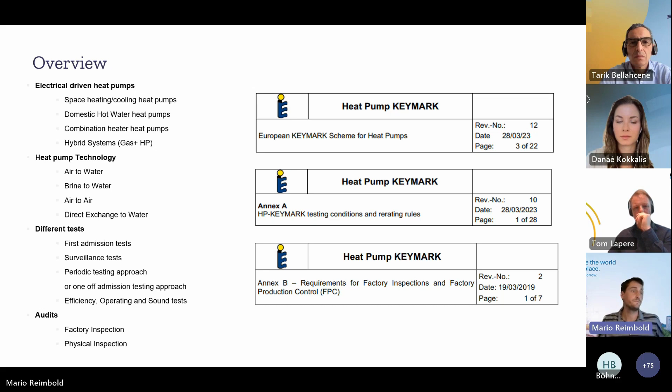Just to give you a short overview about the most common tested and certified products, most of them follow the EN 14511 and EN 14825 to define the test requirements for setting up the heat pumps, installing them, defining the measurement accuracy, and also defining the test points, which have to be measured depending on the temperature level, either low, medium, or high temperature, and also the climate zone.

And of course, for the domestic hot water, we're following the EN 16147, and for the sound power measurement, we follow the two standards, 12102-1 for the central heating and -2 for the domestic hot water ones. And of course, I mentioned the groundwater heat pumps. We're following this standard here, and all of them in the current version.

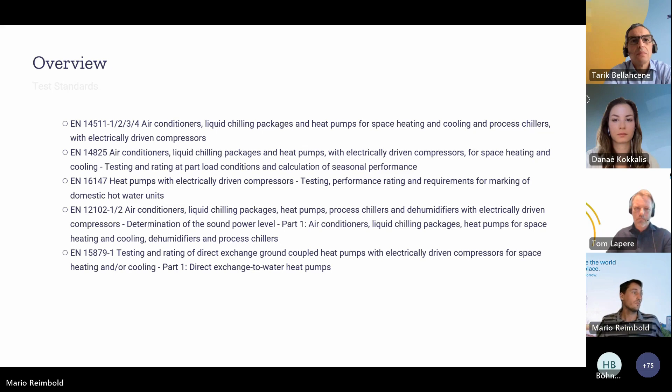So let's have a look at the testing procedure. I created this table a while ago, and I still had to adjust it a bit, but I would like to focus now on columns B and C, which are admission and surveillance, because I would like to point out the difference between them.

When we're talking about the space heating or the space cooling test, the effort at the first admission is higher than the effort during the surveillance test. That means if you have, for example, a heat pump which has a certification for low and medium temperature, or which wants to have one, then you have to test both of them. For an air-to-water heat pump, for example, A7W35 and A7W55.

And if you do the surveillance later, after 1 year, you just have to do either one of them, which is usually defined by the certification body. So the effort will be lower. Same for space cooling tests: then it is only one application of the two space cooling test points. It is different with the sound power level test. You have to repeat the sound power level test; it doesn't matter if it's a central heating or domestic hot water device.

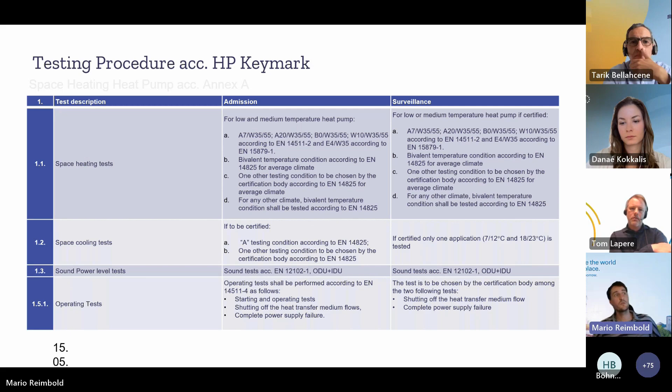The operating tests: we had a big discussion about that within my team. So what are actually operating tests? Because according to 14511, there are actually more operating tests defined. But if we talk within the HP KEYMARK scheme group about the operating test, we talk about the starting tests, shutting off the transfer medium flow and the complete power supply. We're not talking about the boundaries, for example, which take a long time for the test institute. And if we do the surveillance, we have either shutting off the transfer medium flow or complete power supply failure. So you can see that the difference between admission and surveillance is just the amount of necessary testing.

If we talk about domestic hot water devices, it is pretty similar. The sound tests have to be done completely during both admission and surveillance. If we do the tapping test, so the actual performance test, it is similar, and for the operating test, comparable to the central heating devices, you have to do one less. But actually for the domestic hot water test, you have to do pretty much the same during first admission and surveillance.

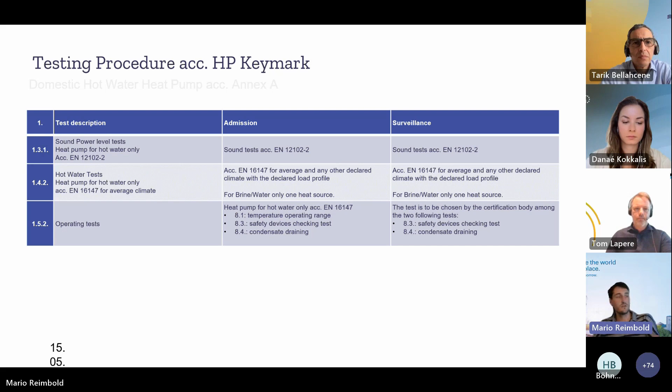And combination heat pumps actually follow both previous slides, depending on which technology you're talking about. Central heating and domestic hot water are tested differently. For central heating, at admission you have more effort, and during surveillance less effort. And for the domestic hot water and the sound test, you have to do all the tests. So these are the different tests which need to be done for admission and surveillance.

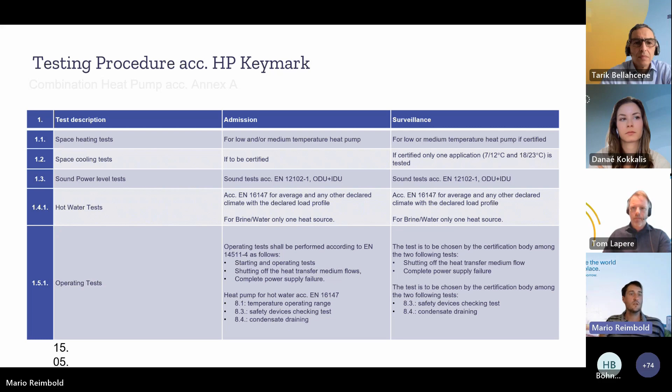And what do we do during the test? I told you that we're basically following the 14511 and 14825 tests. So this is a typical test point for the evaluation of the volume flow during A7W35, and this is actually A2W35. We're just following the standard rules and testing each point according to 14511 and 14825, which is necessary to calculate the seasonal efficiency to follow the ErP rules.

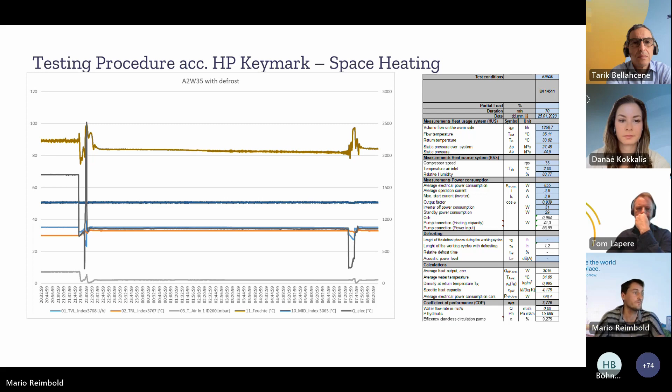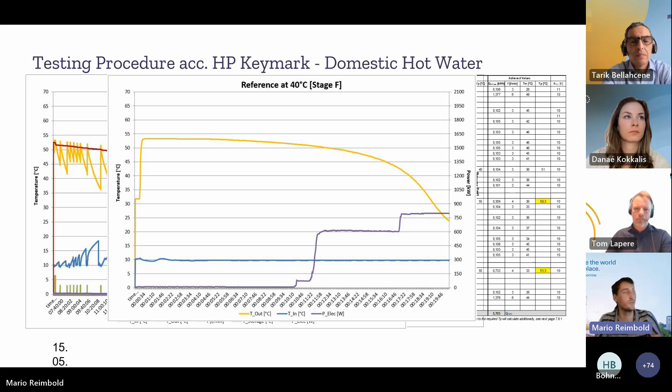And during the domestic hot water test, we have the same situation. You have the heat-up phase. You have the standby power input, where you actually measure the losses. Then you have the tapping profile, where you measure the actual tapping efficiency, and the V40 tests. And as I said, all of them have to be performed during first admission and during the surveillance test.

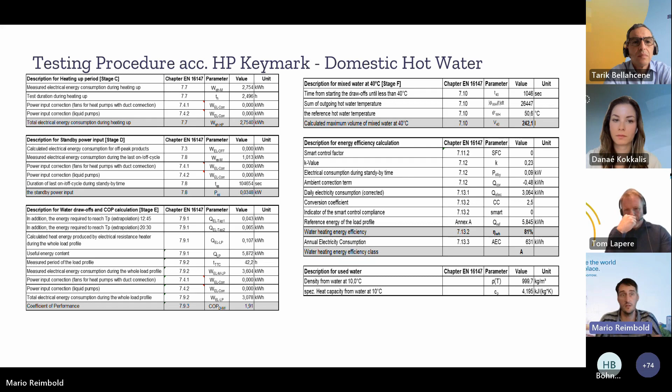The calculation methods: no differences. We still follow the rules, and this is what needs to be presented to the certification body later on, combined in the report, so that everybody can see what was tested, what was the result, and what is the declared value.

The time frame is approximately 1 week for testing a central heating device. It depends on the kind of device, whether it's a split unit or a monoblock unit, and also on the size of the machine. A combination heat pump usually takes 2 weeks because you have to test both the central heating function and the domestic hot water function. And for domestic hot water, it's usually 1 week.

This depends on the hysteresis of the set point. So if you have a large hysteresis, for example 10 or 15 degrees, the tests usually take longer. The standby phase then takes way more than 48 hours; usually it's something between 70 and 80. We have seen that, and this extends the test time.

Common problems: of course, there are problems everywhere during testing. We have to set up the compressor frequencies during the test, especially for the 14825 tests, which means we need the possibility to access the system or the inverter. This is usually done by an external computer or laptop provided by the manufacturer, or within the control unit with a special password to enter the setup area.

And sometimes we experience problems with the measurement technology inside the heat pumps. So we have a defective sensor, or the problem is that we're measuring for a long time.

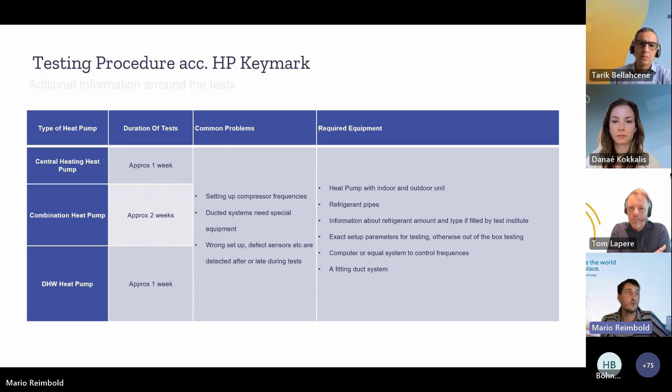It is very important, and the computer or equal system to control the frequencies, and especially for the sound measurements, and I will focus on that now. The fitting duct system is important. It must be the correct shape and the correct material. So let's talk about the sound measurements.

We have usually, this is an example for a domestic hot water pump, a ducted system installed on the top of the machine, and this duct must be a reverberant piping. And if it's not a reverberant piping, or it is an absorbing piping, this can have an influence on the measurement results. And so it is defined in 12102-2 that the material must be reverberant, so that the sound emission which is coming from the actual machine can't be absorbed during the measurement. And we measure the actual sound.

So this is sometimes very difficult to install, because the standard defines that you need lots of space above the heat pump, and some of these heat pumps are even 2.30 meters tall. So you need quite a high acoustic chamber to be able to install it according to the standard. And that's sometimes a problem, but usually a solution is found everywhere.

And the other thing is split units. Then you have to do 2 tests, for the outdoor unit and for the indoor unit, of course. Usually the indoor units are very, very silent, especially if we're talking about hydraulic split. So if we have, for example, an R290 unit, which is constructed as a monoblock device, and it's just working with a hydraulic unit which is sitting inside, there is almost no noise coming from the hydraulic unit, and it is almost impossible to measure it because it is below 20, 22 or 23 dBA.

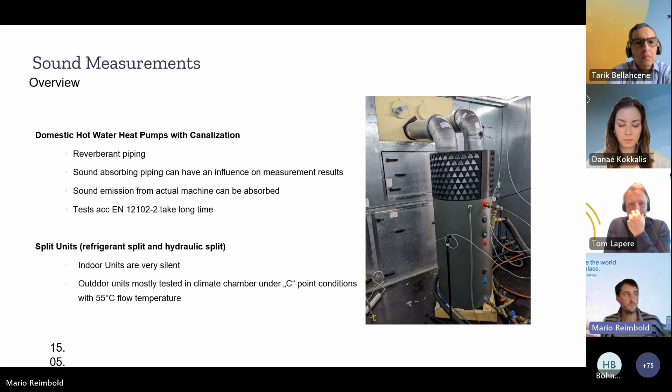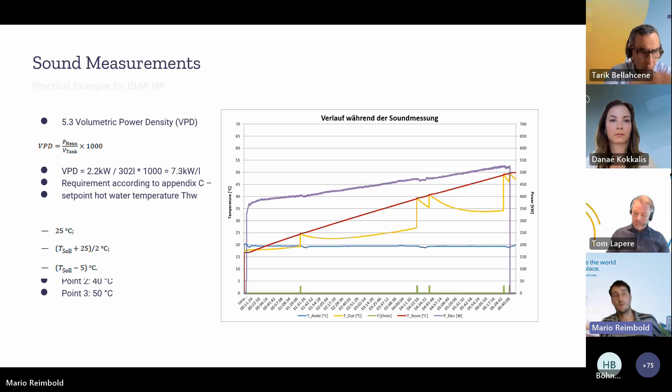So that usually takes a whole day to do that testing, with installing, with heating up, and some of you might know that some domestic hot water heat pumps really have low heating capacities, just a few hundred watts. So it really takes a long time to do this testing. As you can see here, it was something like 7 hours. And yeah, this takes a whole day. Yes, so that was testing procedures for first admission, surveillance tests, and sound measurements.

And now I would like to focus on the factory production control. During the factory production control, which usually happens after the certification, we focus on the production circuits, on the production line in the production plant. And why we're doing it: to ensure that the product is being produced according to the HP KEYMARK rules, of course, and make sure that the product is produced as we have tested it. And if the production plant has an ISO 9001 certification, we can do an abbreviated examination, but we're still focusing on some points of the document parts.

So it's a bit small. I hope you can read it, but what you can see here are 3 pages from the factory production control report, which you can find also online on keymark.eu, and you will find several requirements. The first pages are mostly information, with where it is, the address. Then it contains a list of the certified products, which is really important.

Then the persons who are in charge for the quality and who are in charge for the audit. But after chapter 3 and 4, we're talking about requirements for the actual production, and so that is mostly our focus during the inspections, that we check the measurement instruments which are used during the production or in the production line.

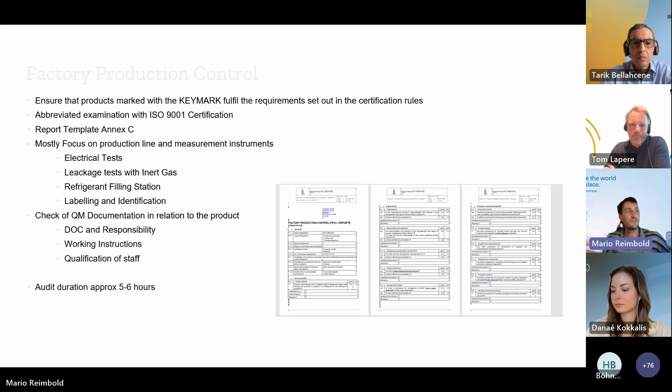And the other thing is the physical inspection. In the physical inspection, we do not focus so much on the production and on the quality management of the plant. We're focusing more on the product. So what we're doing there is we're trying to identify each part of the product and make sure that it is the same as it was during the initial type test. So we check for the compressor, the expansion valve, heat exchanger, condenser, evaporator, whatever you find in the machine, we check for it.

We check dimensions, for example, the same opening for the ventilation, etc. We also check for the software version. We know that there is not a big influence by the software version, because most of the time the software version is just updated for comfort issues, or maybe to delete some errors. It is not affecting the efficiency. At least it should not. But we're still checking it during the initial inspection and then during the physical inspection. So if there is an update, you can see the development, but there shouldn't be any influence on the performance.

If applicable, we can also do a picking. That depends on how many production plants you have, how many devices you have certified, and which approach you're following. I've mentioned the 1 out of 5 approach, and I have mentioned the one-off approach. If you're doing the one-off approach, you don't have to do a picking. But if you do the 1 out of 5 approach, you have to do the picking every following year.

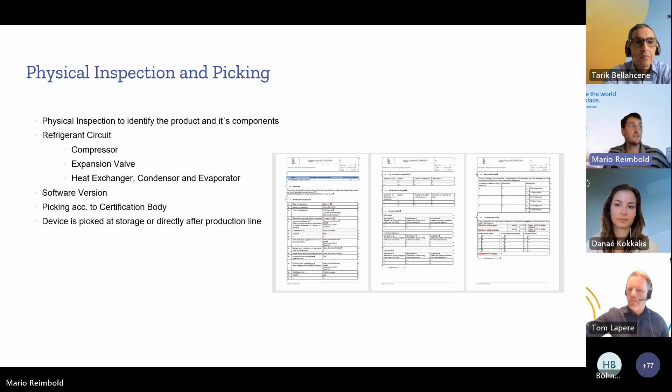So that is basically it. That is the testing procedures for most of the common heat pump devices which are certified in the HP KEYMARK frame, and this is inspection and physical inspection for the production plants.